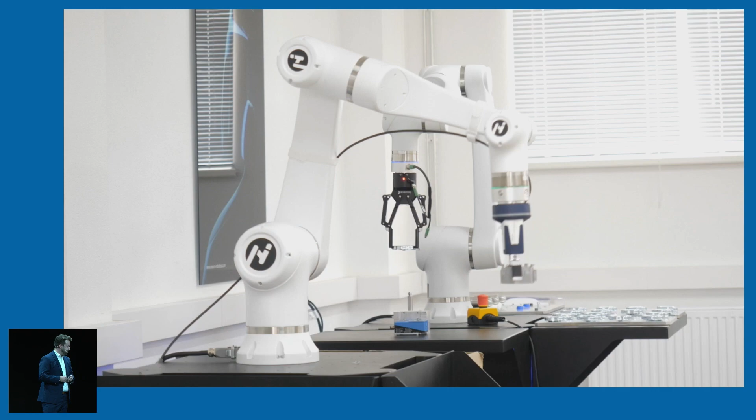We are here to create the future. A good future, where our technologies assist humans. My great vision is making robots an accessory for every human, in every home, in everyday's lives. Are you ready? Are you?

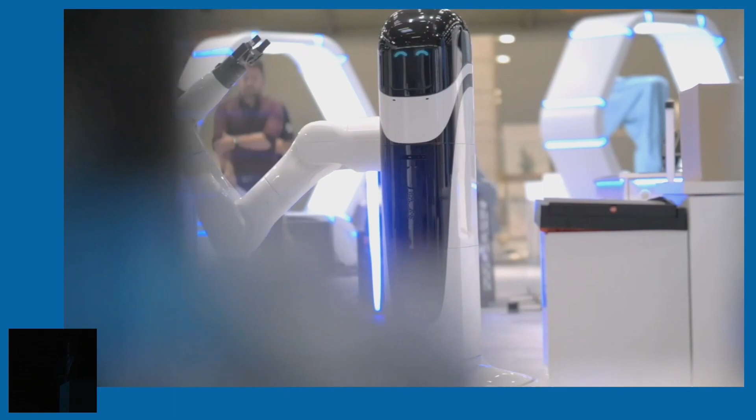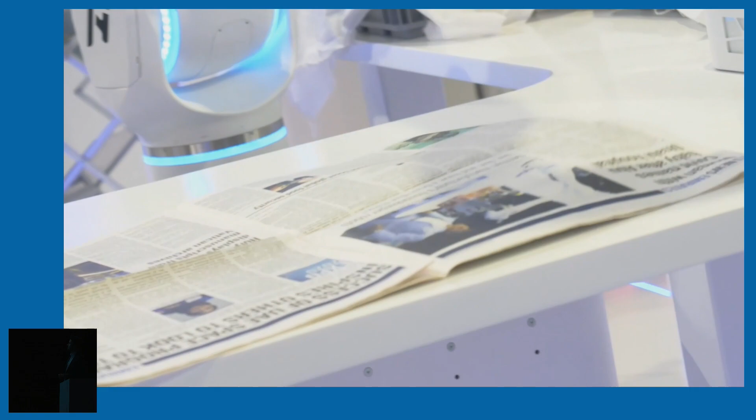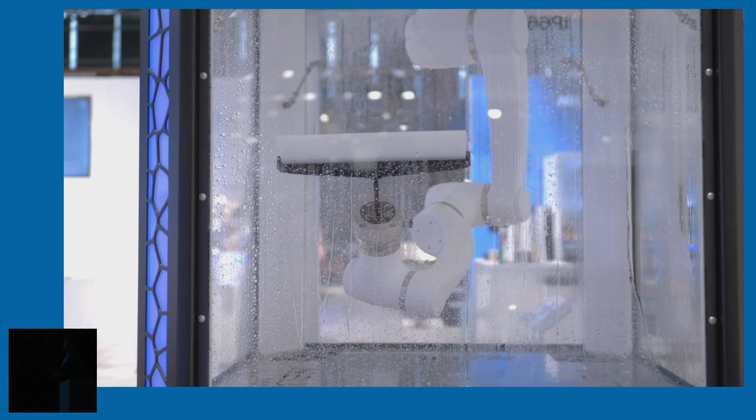All the last big things were actually created by a need. Our aim is to bring our technology together with their solutions to create even better solutions for mankind. The goal of NEURA is what a company brings to the world, the impact. Being more like a technology provider, platform provider for every company in the world one day. Just giving the next step to advance humanity, that's one of the biggest goals.

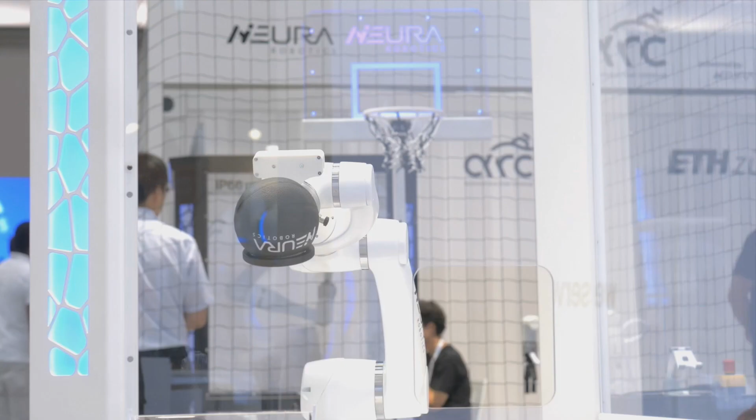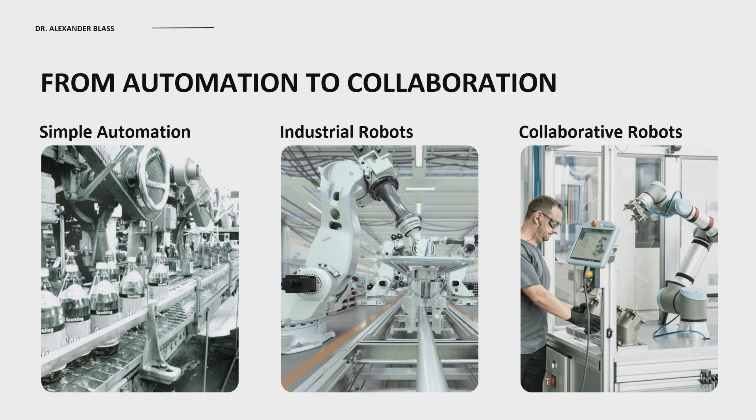I used the word cognitive robot a moment ago, and many of you might not know what a cognitive robot is. Let me explain why we at NEURA call this a new era of cognitive robotics. We've had robots in automation for a very long time. About 60 years ago at General Motors was the first multi-axis industrial robot, which did many things great, and also today industrial robots do many things very well and have their purpose for sure.

Then the next step towards collaborative robotics, where in 2008 Universal Robots took the first step, and until now is the market leader, I would say, in this. This was the step, although it's called collaborative robot, it was about, of course, getting the robot closer to the human, but still these robots need either a fence or some other safety system around it.

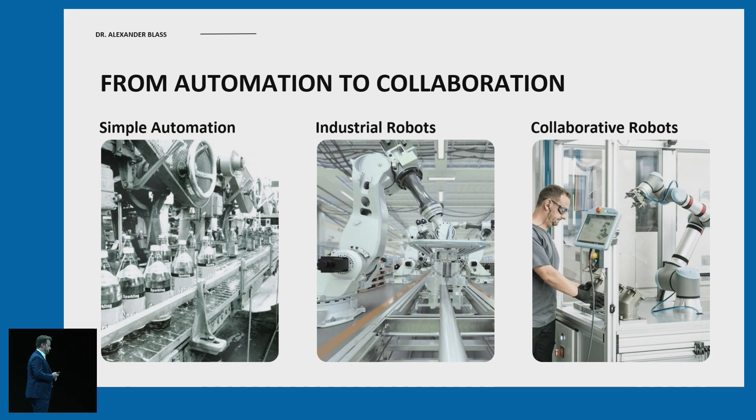But what collaborative robots did very well is the usability, so it's much easier to use, to teach such a robot. This is the reason why many of these are on the market, and whenever I open the news, I see some other company has some new cobot which is great at something. They all have something in common.

They're not really helpful to really assist a human. And why is that? Because they are not able to do some task autonomously. I always have to say, do exactly this, do exactly that, and then they will do that very well. But if I have to tell it in detail what I need, very often I could just solve it myself. So we need a robot that is able to completely understand the task I give to it, and then find a solution by itself.

For that, the robot needs to be able to understand what a human is, and not just, hey, there's some random object, or as cobots do nowadays, the moment they hit something, oh, this could be a human, so I need to be slow enough that I don't hit something that could be a human.

For that, you need sensors, and you need integrated sensors, because at the end, you might have a feeling that if the eyes are always in the same spot and not externally placed, and also other sensors, when they're all integrated in one system, then it's much easier for this system to use this as efficiently as possible. For example, to predict the environment.

To help understand the task and solve it, the robot needs to be able to predict the environment. If I look at my bottle, the robot might think, I'm thirsty, and bring me something. If I have to say, well, I'm thirsty, please bring me this bottle, then I've already done it myself.

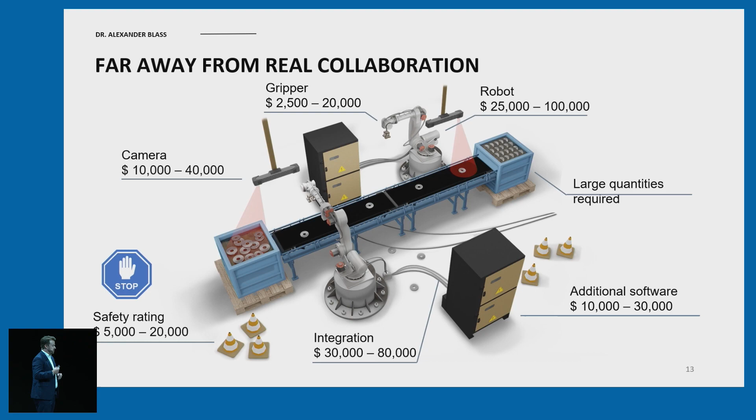Nowadays, a cobot, when you buy it, is about 30%, as we say, of the total application, because you need external sensors, you need software, you need safety, and then if you change something, you might have to start again from the beginning. There are many integrators that use this to make money, because this work needs to be done every single time. But what you really need is a system that has all this included.

Here we have a bubble around our MAiRA that shows also human detection—the robot detects the human, has all the sensors included. This one device thinking is what we want to show, because this is the point when you go from all these different boxes you grab into one device thinking that comes with some functions. You maybe have an example before.

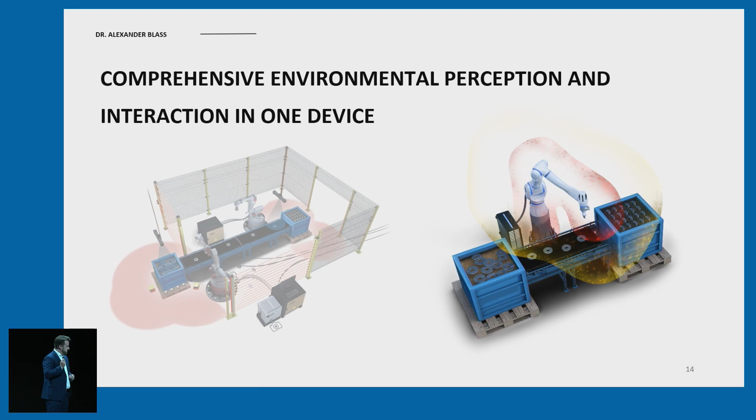Where this happens, we had Steve Jobs on there with a smartphone, and I will come back later on this. So if you have a robot that has senses, like a human, if with the senses the robot is able to understand the environment and then interact with it, this is the point where you come much closer to being really helpful in any situation of your life.

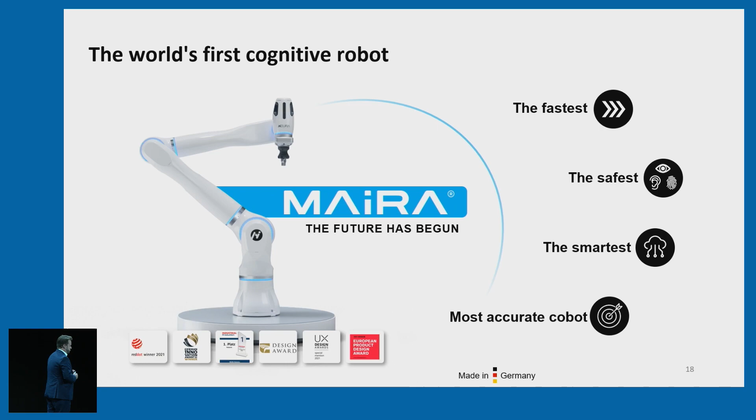For example, our MAiRA, which I'm not going to go too much in detail here. As Germans, we always want to do it faster, better, smaller tolerances, which I can't quite say in English, which we try. So the robot is fast, the robot is precise. I don't know, 6 micron, if you have a feeling what that is - it's a tenth of a human hair that you can go in repeatability here.

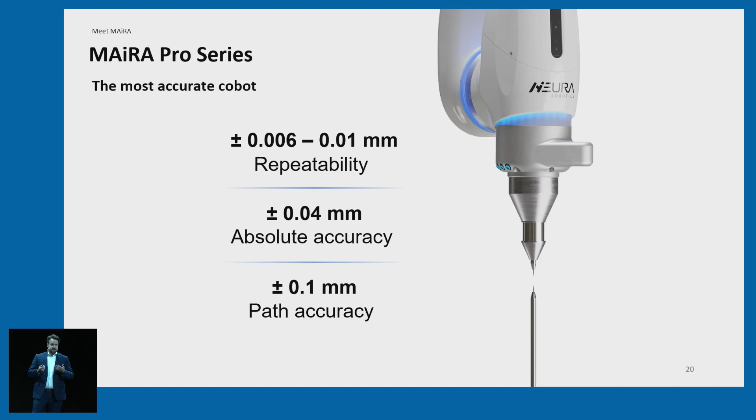But at the end, these are some functions that might be useful for some companies and might not be useful for others. Same as a smartphone, it has some functions that might be useful for you, some might be useful for others. At the end, what is most important is this one-device thinking.

And here, of course, there's some people on the board, you know one, you probably don't know the other, but there are also some systems on the board. So we go from a landline phone to a mobile phone to a smartphone. And at the end, the smartphone is still a mobile phone, but the mobile phone is not a smartphone.

This is also how we see the difference between collaborative robots and cognitive robots. We use the robot as a platform so that everyone that really wants can provide some input using basic functions from our one-device thinking, that can use the sensors that are always on the same spot within the system, can use basic building blocks in our software, for example our AI, and then write their own program. And then suddenly you can go into all the markets that you want.

Now there are some companies I look forward to, for example, in Silicon Valley that say, okay, we have the greatest software, we might even have an app store, we might have a platform. But would the Apple App Store be as successful on an old Nokia 3210 or whatever? I don't think so. So it's very important that you have good software, that you also have good hardware, and then maybe other blocks like AI and so on.

This is completely what we try to advance to really get the technology - I'm not going to go in detail - but to really get the technology into our products. So all of these technologies are in-house technologies so that we can really tune them as much as we need, as much as we want, to really get the product at the end that can profit from all of these. And there are a few products on the board, which later on you can ask me about or look on our website.

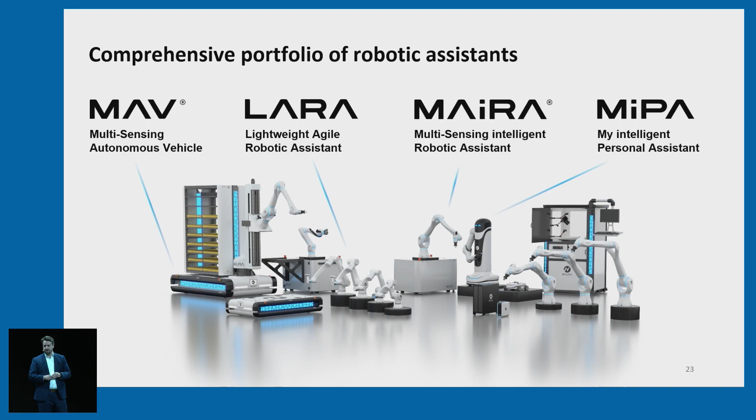I want to talk about AI especially, because all of these profit from our own AI, which is an AI that is locally on the system. Because if you go to, I'm coming from Baden-Württemberg, Stuttgart, so if you go to like Daimler, Bosch, and these companies, and you say, hey, we have a nice AI that sends pictures and video, so super sensitive data, to the cloud, usually you can go home.

We provide a local cloud as an example, but this is only part of the AI. You can interact with the AI, which we need, because at the end, everyone should be able to interact with the robot. You can speak with the robot, you can show the robot something, the same as a human would interact. You can guide the robot, but at the end, you can also code with the robot if you really prefer to.

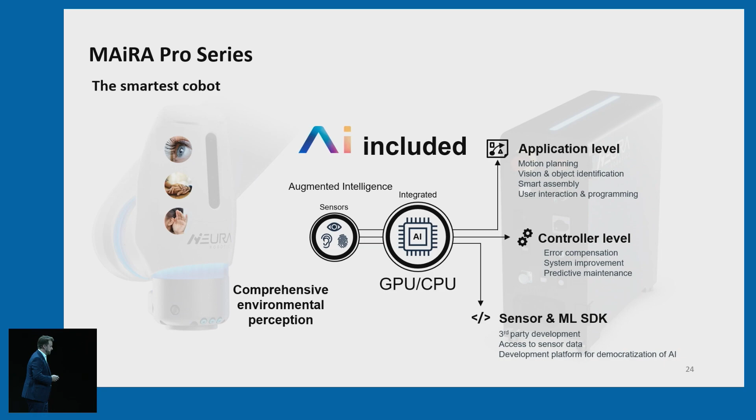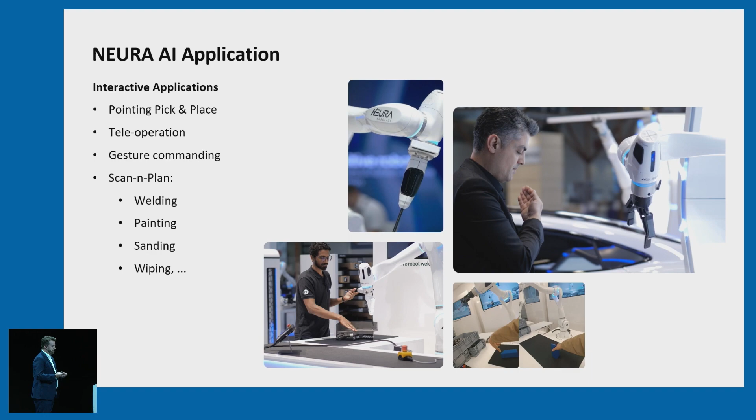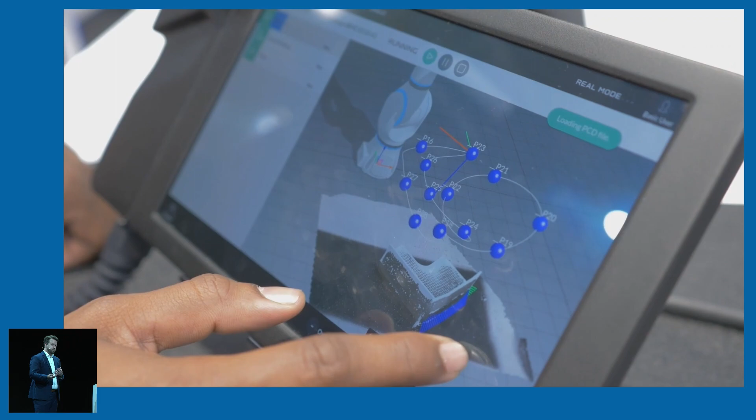I have a few examples of AI, since I heard you guys are also a bit technical. Some features, for example, would be this here. Why do I show this? In Germany, we have a lack of skilled workers, Fachkräftemangel. So if I use a robot, I don't want to be the skilled worker that tells the robot what to do, with the robot just being the helping hand. I want the robot to be the expert.

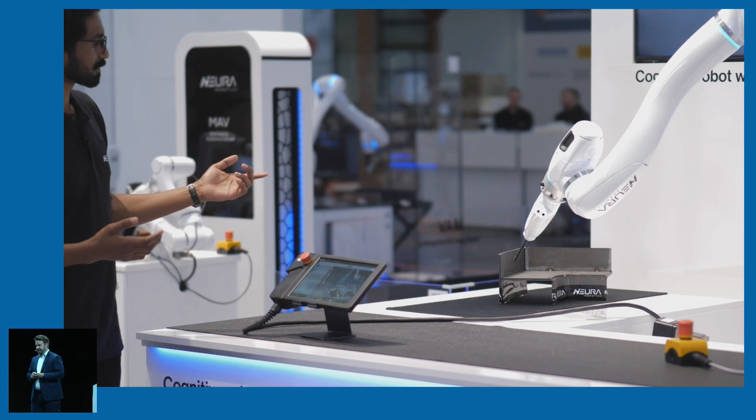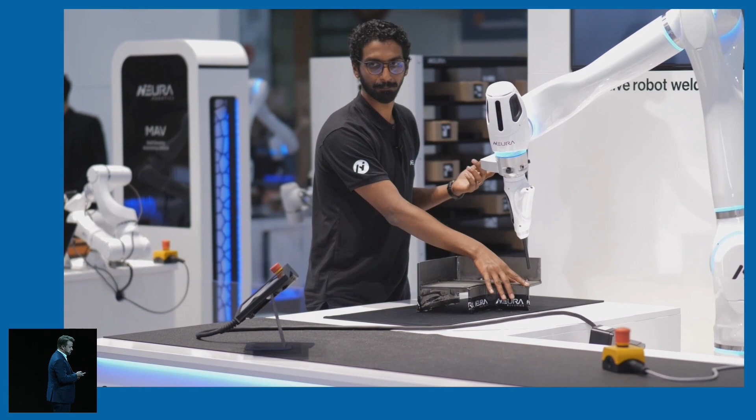In this case, with a partner from welding, we have taught the robot how to be an expert in welding. The robot sees the product, sees how thick the metal is, knows how to weld, what welding system to use, how much power source, how much electricity, how much speed, and what kind of welding.

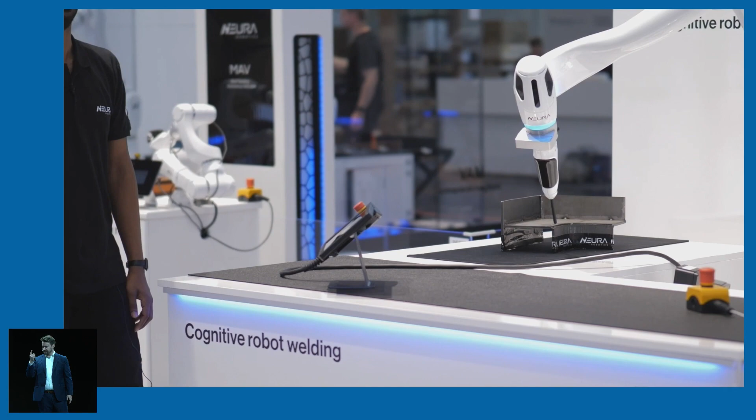And I, as I would with a welding expert, only use my finger, because I always have this with me, and show on the object where I want to weld from here to here. The robot doesn't just look like a dog at my finger, but understands where I'm pointing, and understands on the object where it needs to weld, and everything else the robot does itself. That also means the next time I bring the same object and put it differently in the room, the robot still knows where to weld because it understood on the object where to weld.

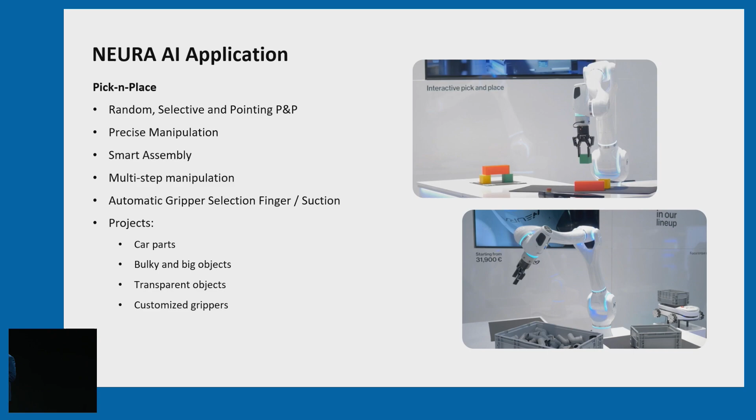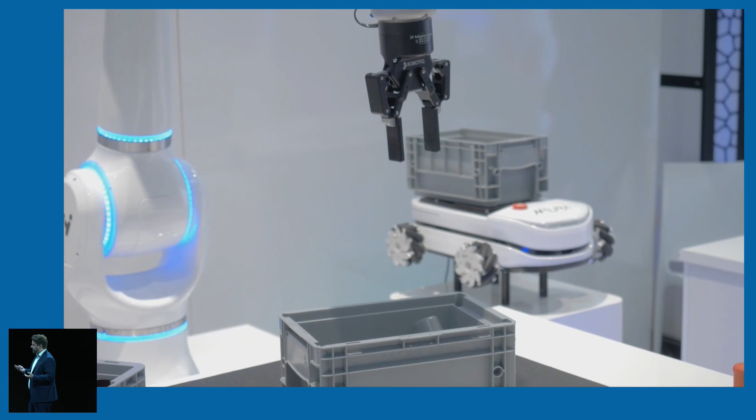Pick and place might be something that many here find very trivial, but bin picking is something that experts from the industry know is not so easy. Grabbing a random box with unknown objects and finding a way to solve it, or as you see in the moment, just giving the robot a task.

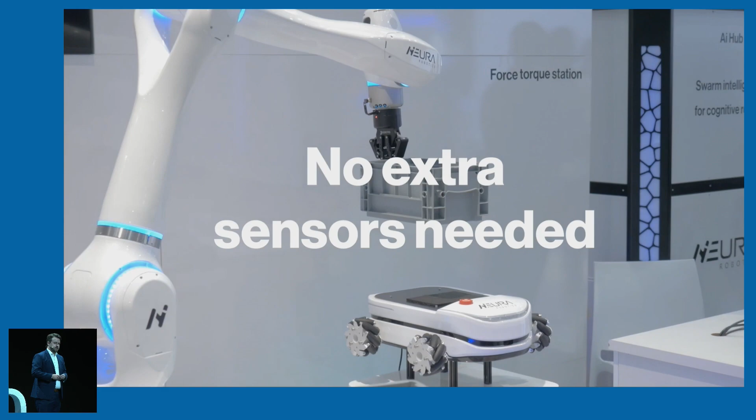For example, this box now has to be moved somewhere else, and the robot itself finds a solution how to do it. I don't have to hard code 'move from here to here, then grab, then do something else.' I tell the robot what to do, and it finds a solution itself.

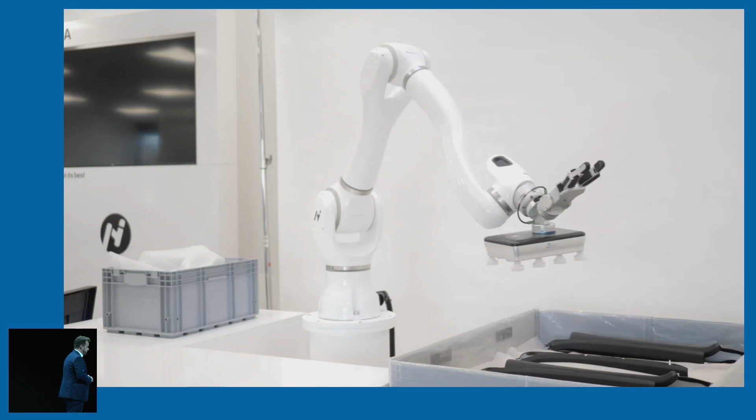Good example from automotive. I'm not going to say which OEM, but the robot, as you can see, has two different grippers: a suction gripper and a two-finger gripper, and there are some objects in there, differently oriented. Usually this cannot be automated because some worker has to actually look at how the objects lie, since they're randomly distributed.

Here the robot itself looks at the object. If it finds a nice surface, it will use the suction gripper, and otherwise it will use the two-finger gripper.

I'll wait a bit longer. At the end, you see there's another problem: there's some plastic wrap and then paper underneath. What do you do with that? Because you want to continue underneath. This the robot also sees. It sees a nice surface, grabs the object, moves away, sees another nice surface underneath, grabs the object, moves away.

These are all examples where an autonomous system is much better at really solving tasks because it can think, and I don't have to find every solution beforehand, because situations could happen that I didn't anticipate.

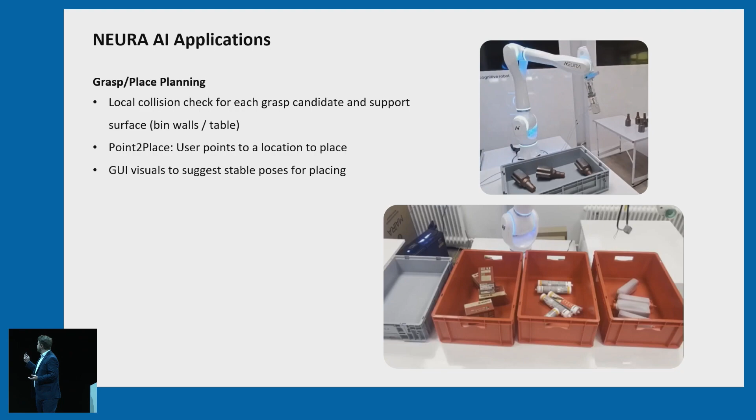The same applies not only for picking out of the box, but placing into the box. It's a bit small here, I think - it's fine, I want to show this video before I continue. People in the first row might see the company name on this; this is a project with a very big company, I'm not going to say which, but you can see for yourself. Here it is about placing stuff into a box.

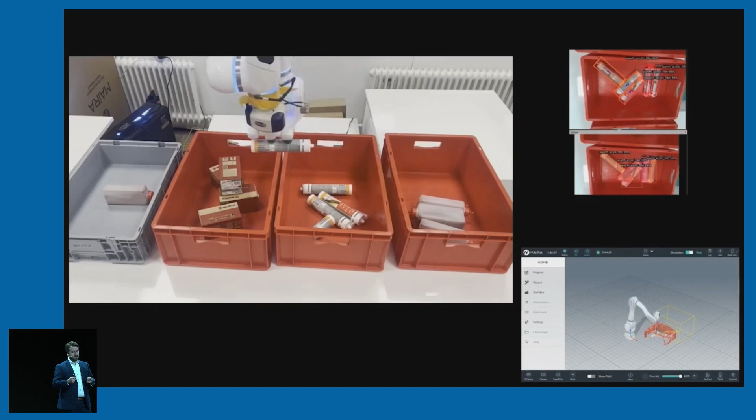Again, here we were approached because of the robot's ability to think for itself. The AI will see how many objects it needs to place, what kind of object - this comes out of the system - and then finds the best way to place them into the box in the most efficient way.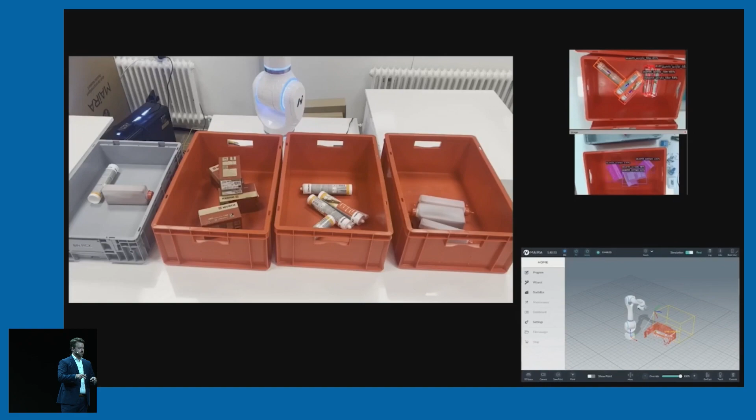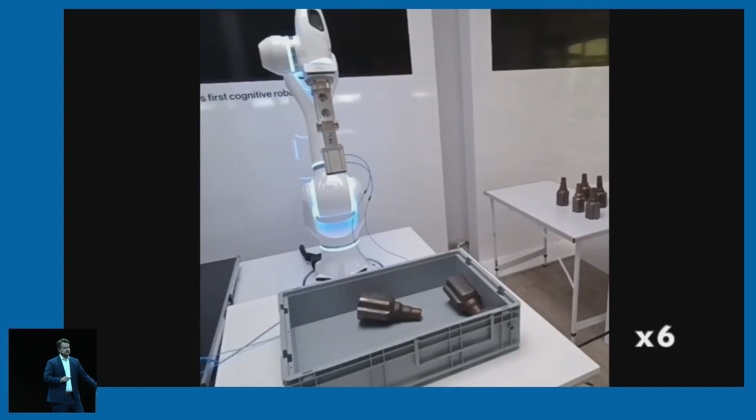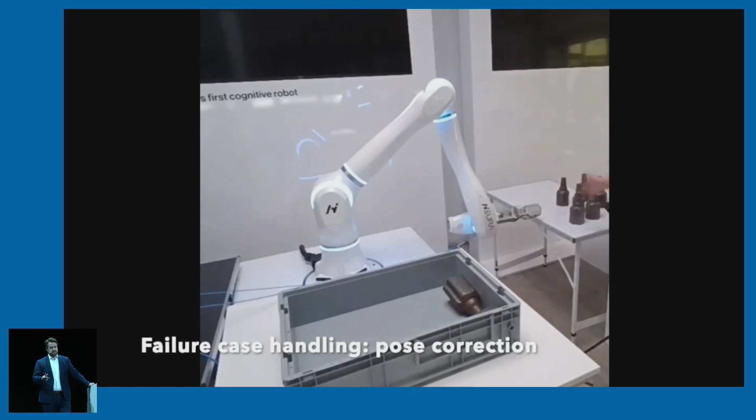Another example, which I always show at the end because everyone is already annoyed with me for showing too many videos, but this is another automotive OEM that needs to grab stuff out of the box. The robot here sees how it grabbed something, and sees also when it grabbed something wrong. In this case, I was annoying and moved the piece around a bit, and the robot sees that and corrects at the end. So another example of the robot thinking, instead of me having to think for it.

That works with one arm, that works with two arms. Very important, because at some point we also want to build our own robots, and for that we need more than just one hand.

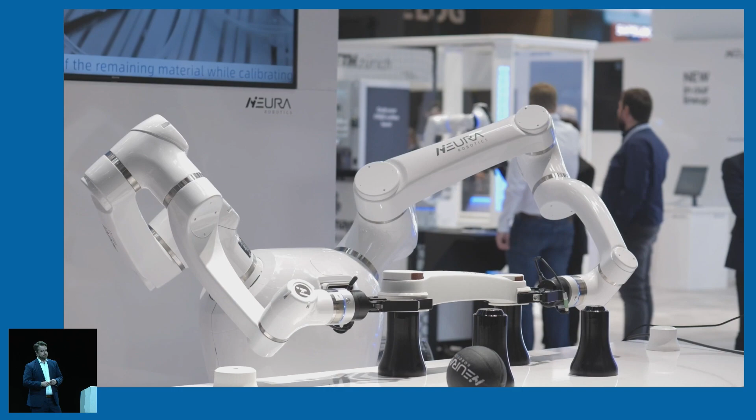But there's more. I showed a few features, but at the end, for a robot to be really helpful, the robot needs to be also safe enough. And this is always when I get asked, okay, what does that mean? In industry, we can still say there's no one around, but when you go to service, household, and these kind of things, it's important. And so we also have sensors.

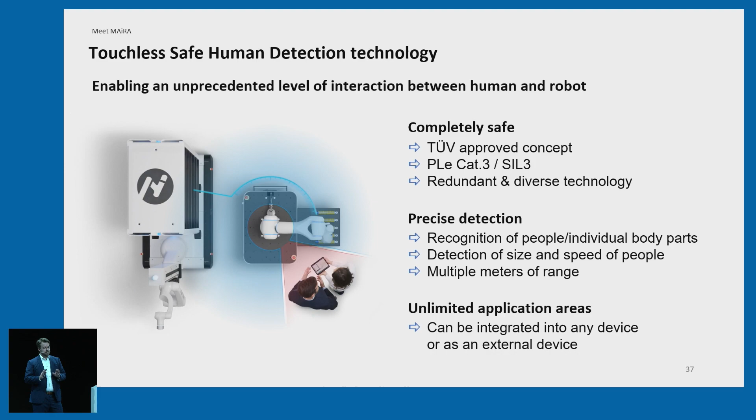The robot is able, on a distance of 3 to 4 meters, to be safe. That's when TÜV says diverse and redundant, privacy protecting, so there's no cameras involved. The robot is able, and I'll show the video here, to detect a human and see there is a human, not a column or a wall, but a human, and react to that.

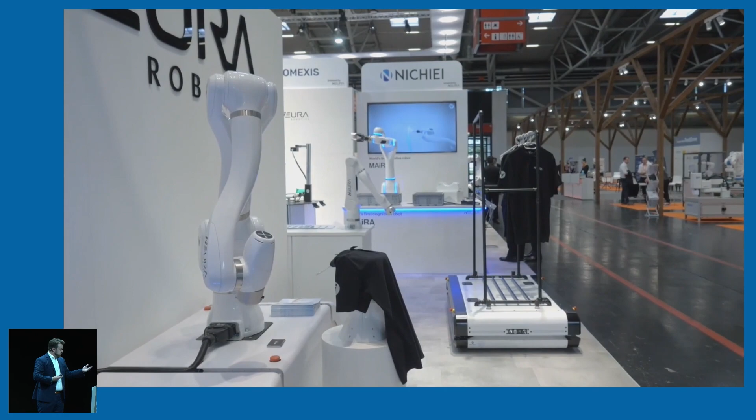So that means if I come closer, the robot will be slower and stop at some point, or find a way around me. This also works, as you can see, when it's covered up. And once it's safe again for the robot, it will start working again. So it doesn't matter at the end.

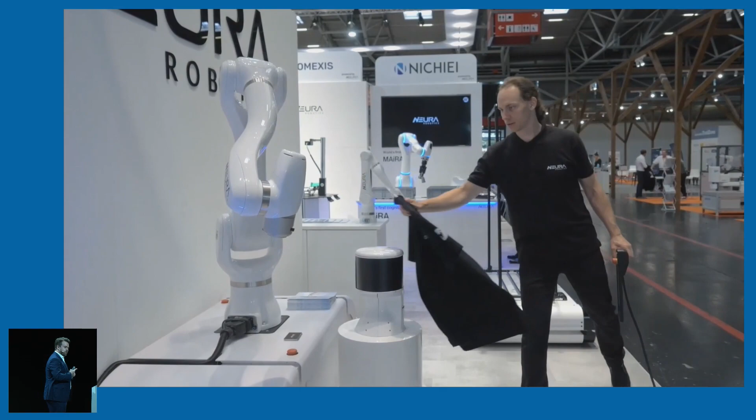AI, of course, will try its best to be nice to the human, let's say, to be distant and to not hurt. But at the end, if the sensor says there's danger, the power is gone. There's something all AI at the moment needs, and that's power, to eat, to live, and so then it's cut.

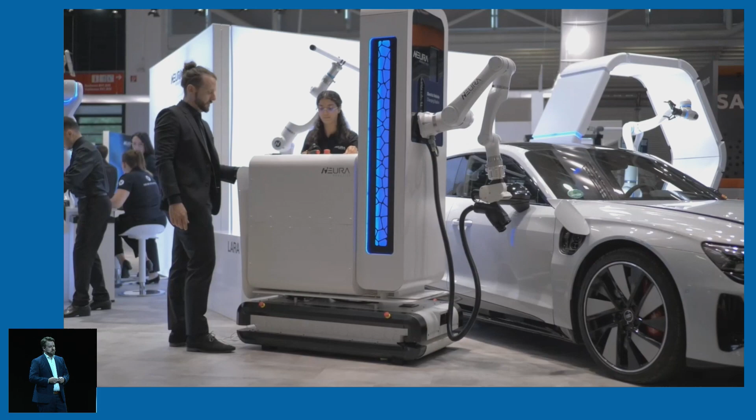A quite similar industrial case, but also looking quite different, is with an automotive OEM, because when you build cars that are electrically charged, to put the battery in the car, it needs to be empty. So at the end, the question is: now the car comes from the conveyor belt, what do you do? It's empty. So someone needs to go and charge all these.

This is something very easily done by a robot, as long as the robot is autonomously able to find the car, find the spot where you charge, see how to open it, how to feel it, because what you need is a feeling.

You can always try — I don't know if you'd manage — without looking and without feeling, to plug in a USB cable. I can tell you it's quite hard. So you need the feeling of finding the right spot and then pushing in, or you need at least your eyes to see that.

And then I teased this before. We can do this locally, but of course AI should work together with AI. So what we try our best to do is find technology where, on one hand, a robot can learn together with another robot, but on the other hand, if you have a system with many robots and you plug in a new one, you don't want it to need years of training, like humans who have to go to school for 13 years.

I took a bit longer, but that's a different topic. You want it to be plugged in and work right away. This is very, very important and also very achievable. That's why we want to centralize as much knowledge, as much brain power as possible into our local cloud.

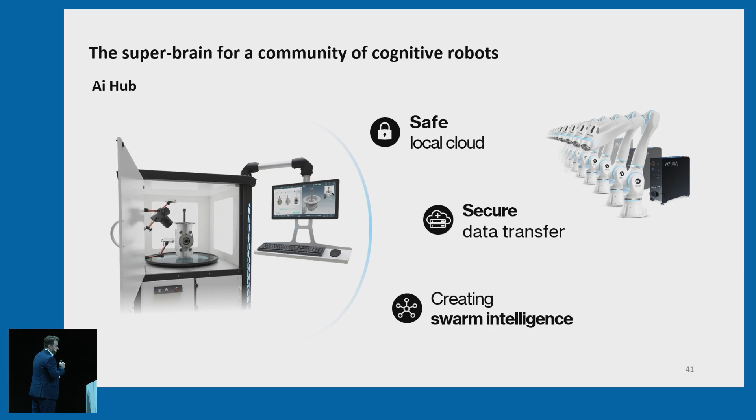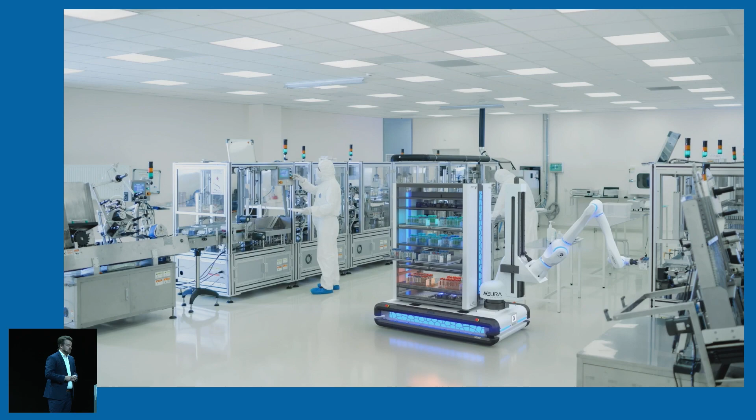Or to be in lab automation, where the main problem is you have all these expensive tools laying around, and then a test takes, I don't know, 10 hours, 8 hours, and then you're done. But at night, people need to sleep — robots, not necessarily. So what this project is about is that the robot autonomously goes around day, night, 24/7, whatever you need, and recharges the testing stations, takes something out, puts something else in.

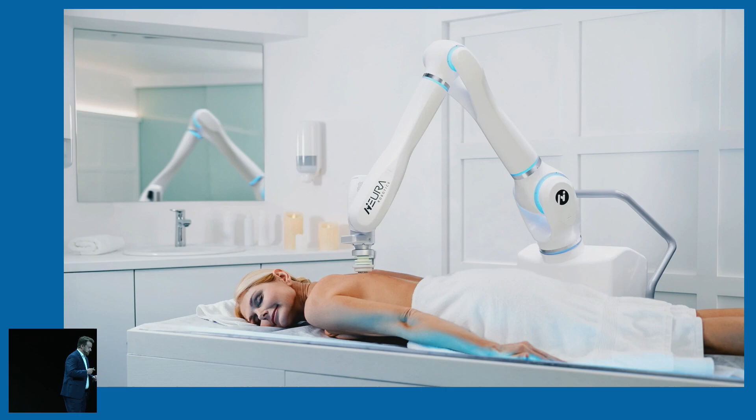There are many other applications. I just want to show one more at this point. I always put this on here because when I see this picture, I think, why would I need a robot to massage me? And I bet you, all of you, or nearly all of you, have the same thought.

Why is that? For me personally, it's such a weird thought to have a robot massaging me. But if you think about it, technology-wise, the robot can feel very precisely. We can put ultrasound that knows exactly where you need to be massaged to feel well, or medically massaged. And then the robot will do this very well.

Actually, in China—I read this the other day—we have 1 million massage salons, but only 250,000 educated or trained massage therapists. So why is that? Suddenly you can understand: if I go to a massage salon, the probability is higher to get an untrained random massage than a trained one. Then it's much clearer that you'd trust the technology. So when we bring one of our robots to do a massage at one of these salons, and people know it's a robot, you'll have a long line outside.

So it's a different feeling, maybe different culture, also different accessibility to technology. If that's massage or breast cancer screening, which is the same technology, then suddenly the feeling is quite different. Should I, if I can't access a doctor because there aren't many, have no technology at all, or have a robot that can do this maybe 90-95% as well? Then it's very clear—everyone will say, okay, I want this. But massage, since we see it as a pleasure, gives us quite a different feeling toward the technology, compared to massage versus tic-tac-toe or chess.

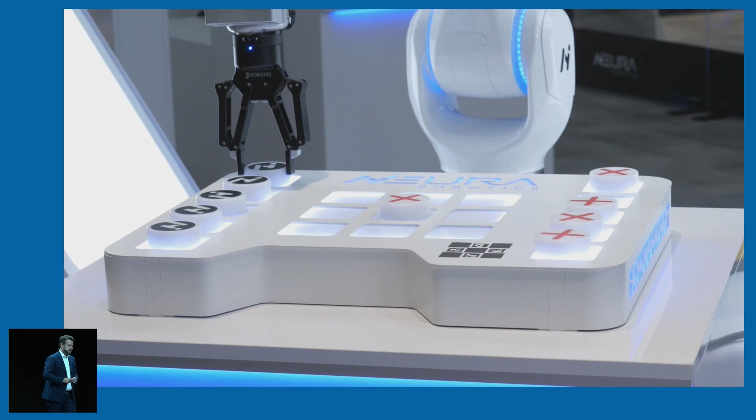I put this up as a chess scene for a moment, because the speaker after me, which I find very interesting, will talk about chess afterwards.

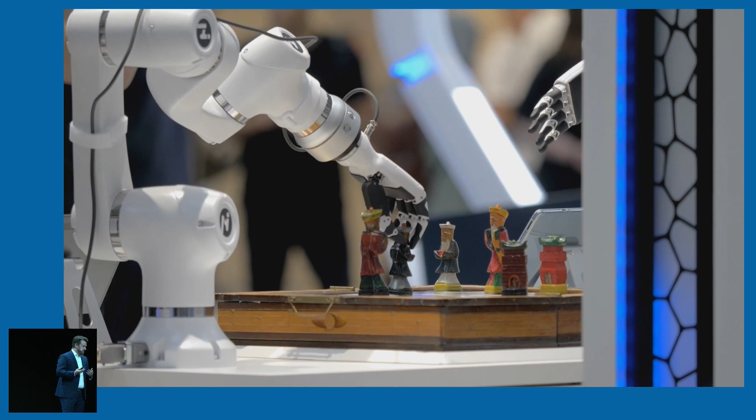At the end, these are technologies that, when I talk to industrial partners—which are very often there—nowadays in industry the robot arm is very well accepted, and that's where we can make a lot of revenue, that's just fact. But I always bring these examples because where we really want to go is not only industry, but also, as I said before, elderly care and service. There are many open markets we haven't been able to approach. And if we bring a mobile arm or a platform that can do all of these things, then we have completely new possibilities.

Our MIPA platform, which comes with one arm or two arms, we bring as a platform concept, so it comes with some basic functions. One of them is cleaning a room. One is wiping tables. One is cleaning your dishwasher, which is currently a project we're doing with a very big, well-known company in Germany that builds dishwashers.

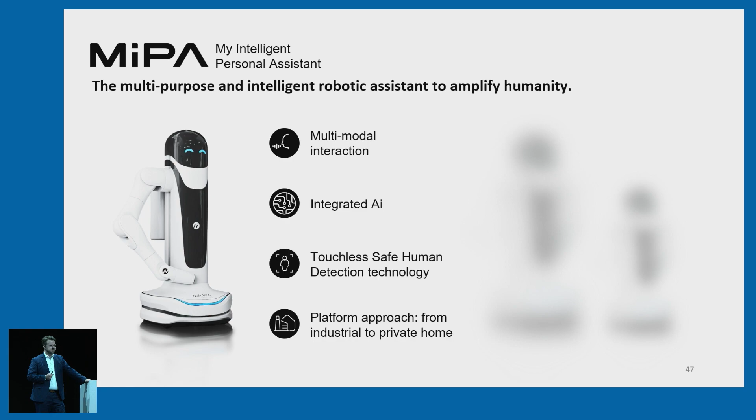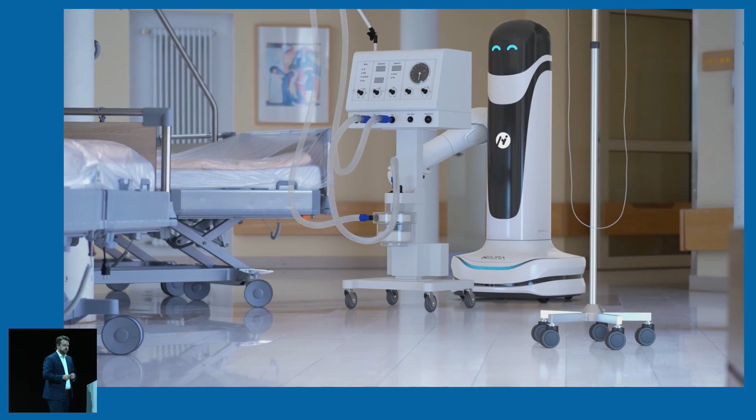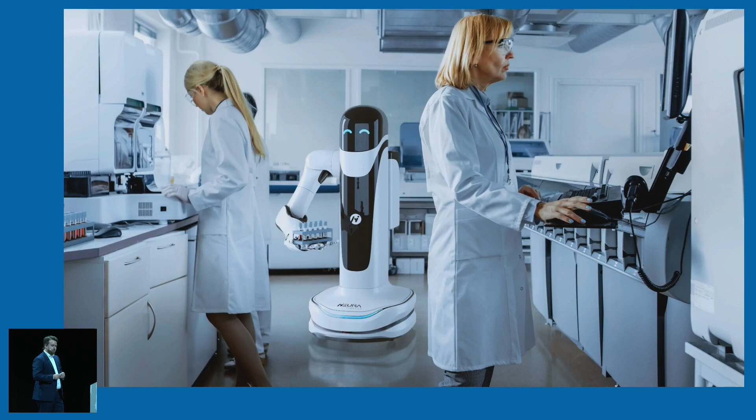There are many jobs in healthcare that are not filled at the moment, or filled badly, or don't have enough personnel for all these tasks. So there are already many opportunities for robots to take on jobs without taking anyone's job. It might be just moving stuff around, bringing some water or a drink, even pills. There are many tasks where robots can help already today, where a doctor or nurse doesn't necessarily need to be present. And that's not only in elderly care—there are many other situations like this too.

Supermarkets are a big example, with many interesting opportunities. On one hand, at night when everyone sleeps, we want to be able to autonomously fill the shelves—we don't need someone getting up in the middle of the night. Of course, we can also have an autonomous shelving system for a small supermarket. I bring this example because we have one where I live, where you don't need someone to stack the shelves—you just put a box in and it automatically moves there.

Of course there are other systems, but with these autonomous features, you can solve many problems where you don't have to plan exactly how many boxes to put where in advance. But if you have an autonomous system—sorry, I keep talking about automotive today, which isn't what I mean—if you give it the whole task, then while you sleep at night, it will think for you. It can reason: there are some products that usually lie here, I should bring them there. Or, there's a box that's maybe broken or slightly damaged, where a normal system would just say 'error, help me.' Instead, it can think: I can detect this box, it should usually go here, so I put it there.

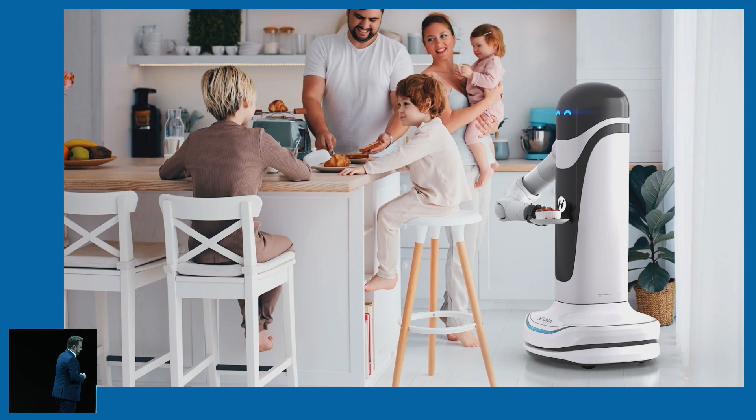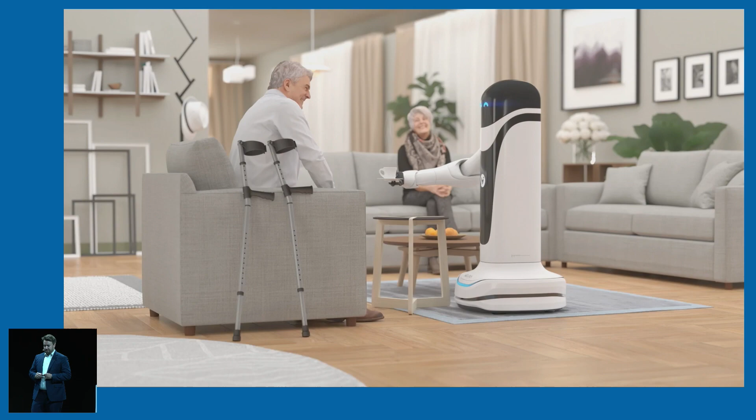This picture I always love to have on for a long time, this and this and this. Why is that the case? Especially this one - someone came to me the other day and said, that's all nice and good, but I don't want my parents to just be supervised by a robot. And then I'm asking, if you bring your parents when they're old and cannot live alone anymore to some elderly care, who guarantees that someone really takes care of them? In an elderly care where they're maybe understaffed, worried about other things than talking to your parents - maybe someone is dying or someone needs medical help - then these things that are very nice, or even things that are very hard to do.

For example, people that have to lie down a lot, you need to rotate them from one corner to the other once in a while. This is very often not done. How do I know this? We talk very much to these diaconates and elderly cares that really want to use these robots because they say, we know many of these jobs are not done correctly, but what can we do? We don't find personnel to do that, or the personnel we have doesn't like to do it, wants to do other things.

So then I say, do you want your parents not to be taken care of, or do you rather want a robot that takes away all the tasks others don't want to do, so that the staff can take care of them by choice - by having the time to choose these things to be done, like talking to them. So maybe the robot doesn't have to talk, but it can talk. But if the robot can do so many other things that the service personnel has time to talk to your parents, then why not? Maybe the robot is able to help a person so much that they can stay at home instead of going to the elderly care center. Maybe there's just a few small things that you need support with, and instead you can keep living your life at home.

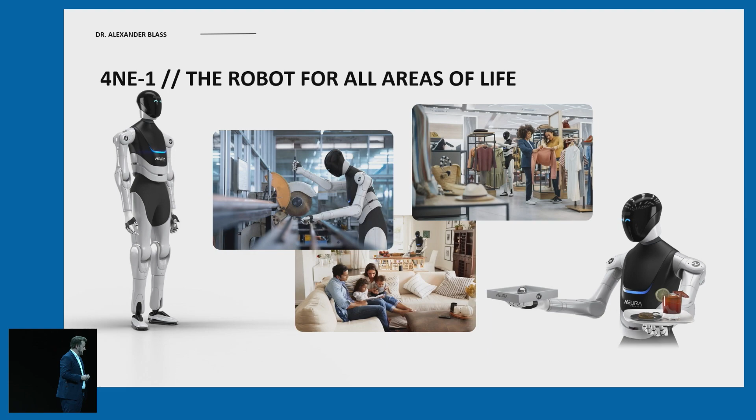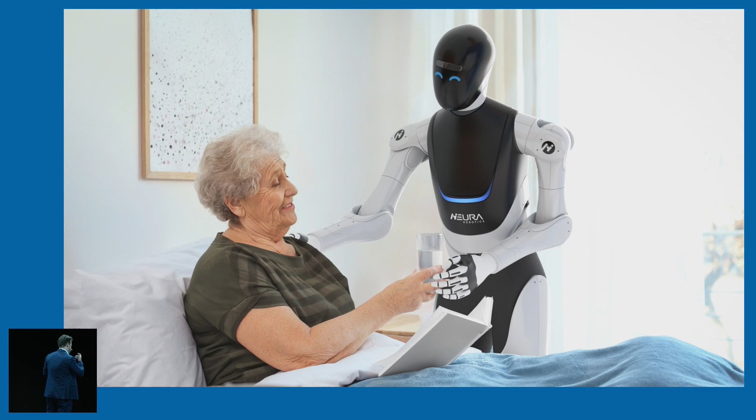And of course, it's nice to have a skeleton that can do many things. Does it really need to do this? Not so sure. Does it really need to do that? Okay, now we can argue. Is it nicer for my parents to talk to a robot that looks like a human? Not so sure, honestly. We always try to stay quite abstract and far away from actually looking like a human, because if it's too close, it's very easy to become a bit creepy. That's what we don't want.

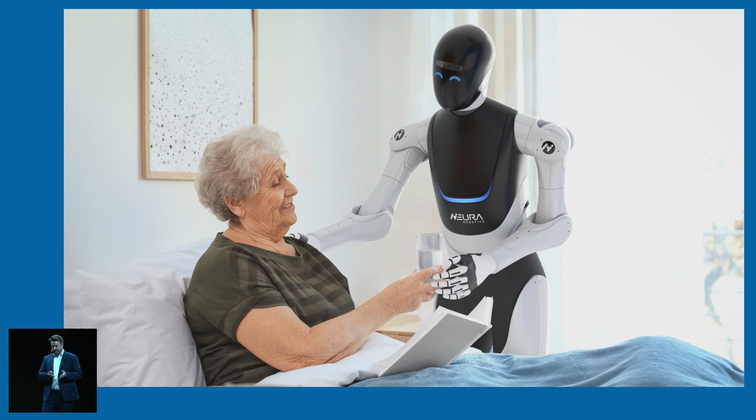But do I need a humanoid robot to take care of my parents? The answer is, no, I do not. It might be nice that my mom can talk to something that looks like a human, I don't know, everyone is different. Do we really need it? No. Do we need a humanoid in this situation? Again, maybe. It might be nice to have something with a humanoid skeleton to take care of everything. But if I have a platform that can already do all of these things today, because all of this is state of the art, then let's further develop these things so that at some time we can also have this, maybe rather for this than for cleaning at home.

So we are from Metzingen. In Metzingen, everyone asked me, oh, this is where Hugo Boss is. Some newspaper a while ago wrote, now there's a new boss in town, so, other topic.

But so there is some situation where it makes sense to have a humanoid skeleton, and that's how I started this, because we built the environment in a way that is best for us. So when we talk about clothing, for example, it might make sense that the humanoid, 4NE-1, goes on a catwalk, shows a few suits, a few pieces of clothing, because there we're in a scenario where we need something human-like, because it's for us. But that doesn't mean that solving things at home, like cleaning, has to be done by something that looks like us. So let me show this.

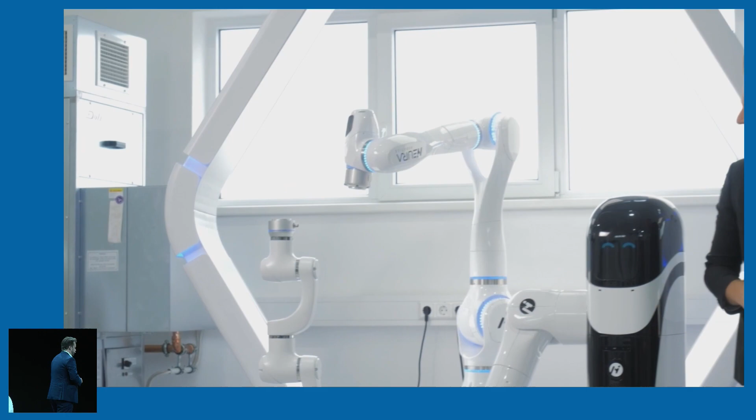Are you ready? This is our CEO, by the way. He said, 'Are you ready? So are you finished? Can I use you?' So are we really ready? This I find very interesting, because when we have nowadays a lot about ChatGPT and all these things, we have very fast technology, new technology coming up. Are we ready for a humanoid robot with a general AI, an all-knowing AI?

I think not at the moment. We have to get there at some point, and when we are there, it'll be there for anyone. Because when we don't give AI a body, like this one, then we have other problems. Right now, when I think of AI, it tells me what I should eat to not get more fat, what I should do to solve a problem. It can give me some knowledge. When I ask ChatGPT, it gives me some nice text or information on how I should handle things. So it's this entity flying around that tells us what to do.

But I start at the beginning with: it's all about time, and it's all about getting the trash out. Does it really help me if the AI tells me to take the trash out? Because this I already know at home, it's a known problem. So I want to give the AI a body, so I can say to the AI, take the trash out, or do something else for me, not the other way around. I think this is the most important thing. I started with technology and I want to end with technology. It's all about time, but it's all about time for us. I want to have the time to decide ourselves when to take the trash out.